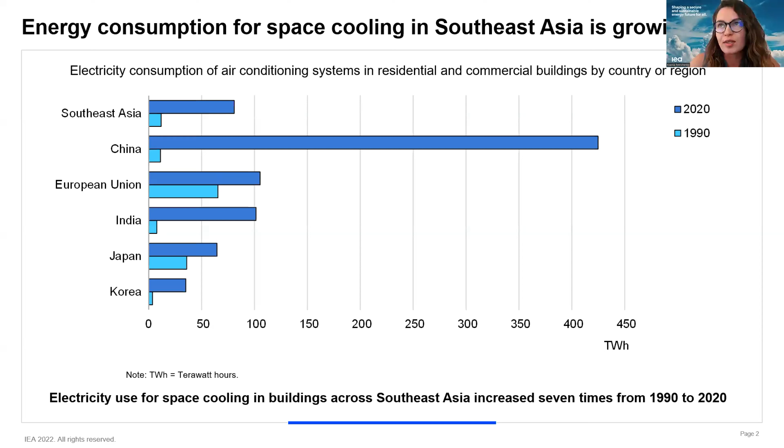From about 12 terawatt hours in 1990 to 80 terawatt hours in 2020, which is almost equivalent to the total annual electricity consumption of the whole country of the Philippines, just to give you a sense of the magnitude.

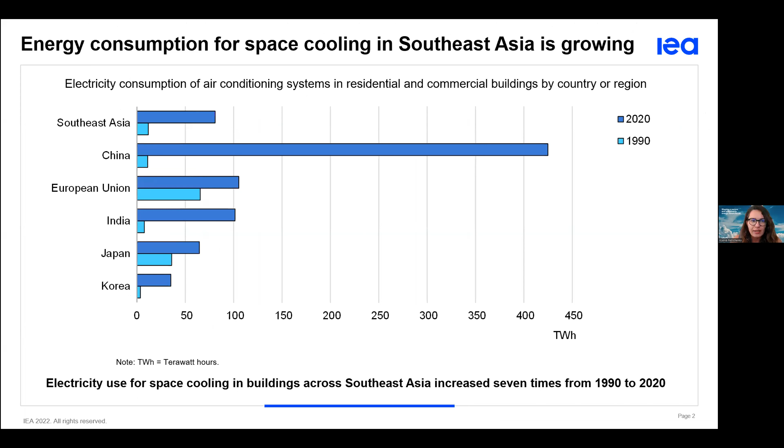In any case, this suggests there is significant potential for growth in the air conditioner market and other space cooling appliances, especially as we see, as Lily mentioned, a significant increase in temperatures and heat waves, with people facing higher heat stress and risk to health, productivity, and the economy.

So IEA estimates that the stock of ACs in ASEAN countries will reach 300 million by 2040, compared to only 50 million today. At the same time, we still estimate that about 40% of the population in this region will not have access to clean and reliable space cooling to satisfy their thermal comfort.

The good news is that the future is not set in stone, and with energy efficiency measures both on the equipment side of cooling, but also in buildings, so more passive measures through improving building envelopes, we can substantially reduce and mitigate the expected growth in electricity demand for cooling and save about 110 terawatt hours of electricity by 2040. This is about the current electricity consumption of Brunei, Cambodia, Lao PDR, and Vietnam combined.

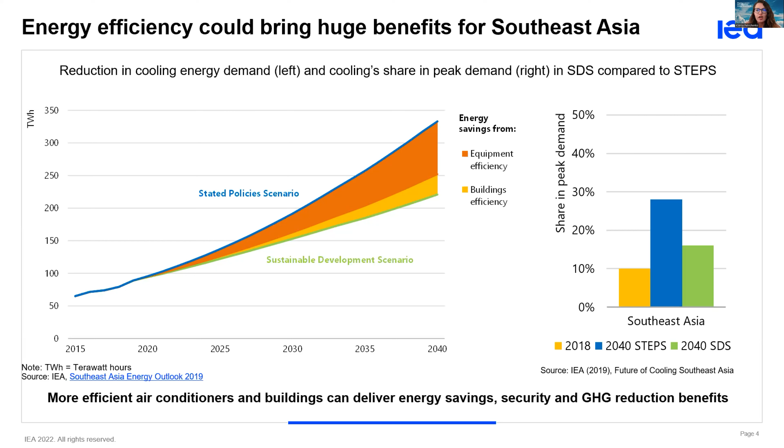On the right-hand side, on the right chart, you can also see that energy efficiency measures can substantially reduce the increase in share of space cooling in peak demand, which is also very important as countries are planning for new power generating infrastructure. With this in mind, IEA developed two roadmaps this year, one on energy efficient space cooling, and the other one on buildings and construction in the ASEAN region.

And these two roadmaps were prepared in collaboration with the ASEAN Centre for Energy and ASEAN Secretariat, and should really be looked at in conjunction, because they are very complementary, and we shouldn't be looking at space cooling in isolation, but really with synergies with the built environment, also with urban planning, as Lily also mentioned.

So we looked at the status of key cooling policies across the region, and as you can see, many ASEAN countries have already implemented mandatory minimum energy performance standards and labeling, or are in the process of developing them for key appliances, air conditioners among them. Fans, which are also one of the key space cooling appliances in the region, are much less prioritized, unfortunately, in terms of policies and regulation. So there is definitely a gap in that regard.

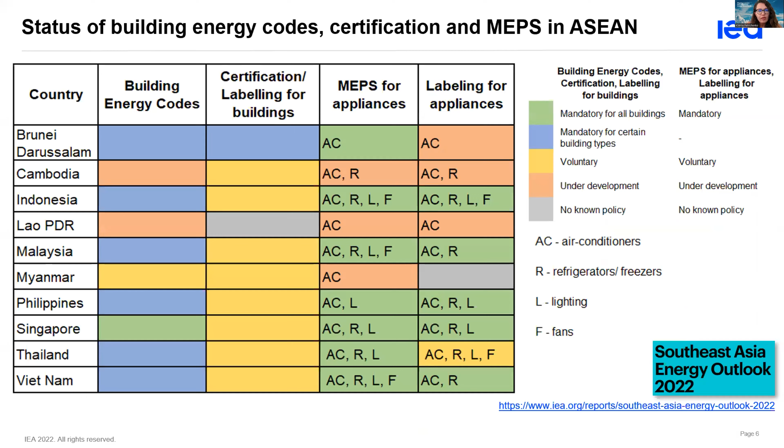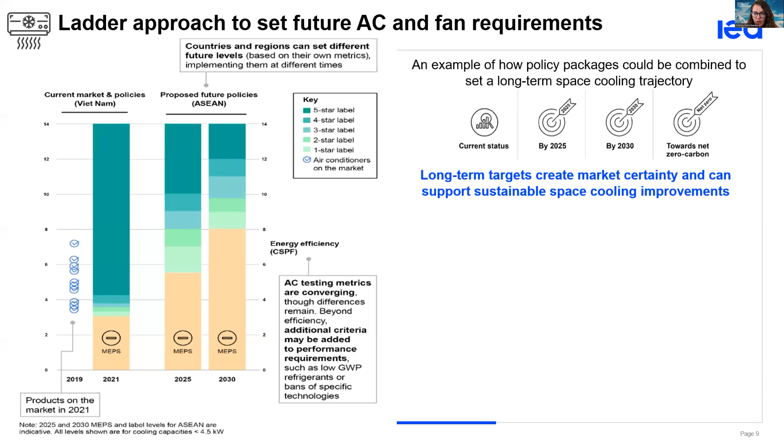And also a lot of appliances are in the 5-star label category, which also limits the incentives to develop much more efficient products. So this kind of ladder approach really helps to set the long-term targets and create market certainty in the long term, also communicate with manufacturers and industry to show what are the updates which are coming up, so the industry has time and can build capacity to adapt to these requirements.

My last chart, just another example from Indonesia on how important this ladder approach is. Indonesia has developed a new label rating last year. And you can see that if you look at the top two bars for 5 and 4 stars labels for air conditioners, the percentage shows how many appliances on the market fall within those two categories. And we can see that about 1/3 of the market is above the new 3-star level already at the moment of

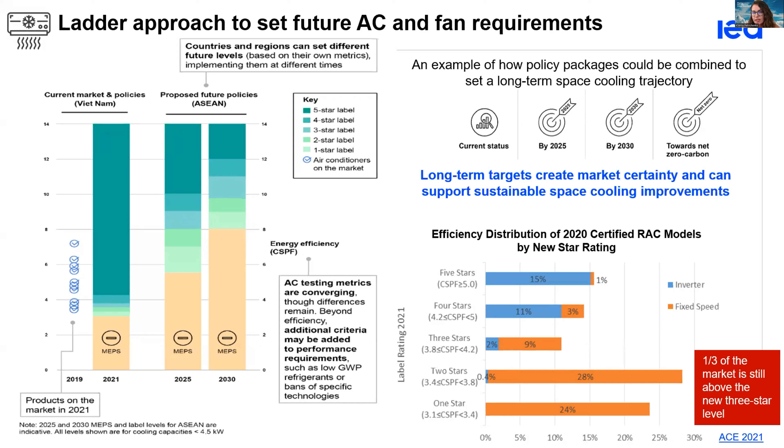enforcing these new standards. So again quite a lot of the market is compliant with a high level efficiency rating, which means that it needs to be further incentivized with the regulation in order to improve the efficiency of the appliances across the market. So with that, I will stop here and happy to answer any questions.

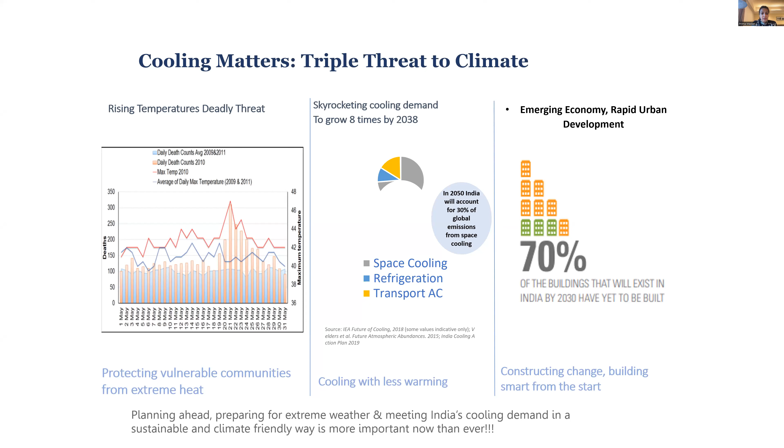Moving a bit towards extreme heat, which further accentuates the need for cooling. Now, we know, and we have experienced it again this year, that climate change is fueling frequent, intense and longer heat waves. Cities and countries which had not really seen rising temperatures earlier on are now really witnessing that globally.

So NRDC, with a broad set of partners, works with government leaders and key experts across India and internationally to develop, launch and implement heat action plans. These plans are comprehensive plans for building resilience to extreme heat events through public awareness and community outreach, early warning systems and interagency coordination mechanisms, capacity building amongst healthcare professionals, and reducing heat exposures and promoting adaptive measures. So public health really is the core of these action plans. Our plans are really focused on protecting health from extreme heat.

Ahmedabad was the first city to develop a heat action plan back in 2013, working with local partners, the Indian Institute of Public Health, Gandhinagar, and the Natural Resources Defense Council. A peer-reviewed study later estimated that nearly 1,200 deaths each year were avoided after implementing the heat action plan in Ahmedabad.

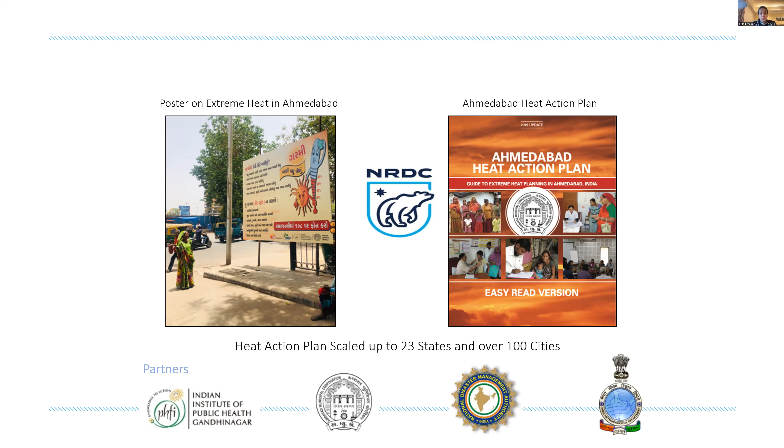Since then, the heat action plan has expanded to over 23 states and 100 cities and districts in India through the leadership of the national agency, the National Disaster Management Authority. So the heat action plan is really an example of how action at a city or state level can be scaled up at a national level. An important component of the heat action plan now is cool roofs as a resilience strategy to extreme heat, and I will turn to that topic now. Next slide, please.

So with a particular focus on vulnerable communities, we have been engaging with cities and states for wide-scale implementation of cool roofs. Cool roof programs implemented at scale can potentially reduce cooling demand through energy savings in air-conditioned buildings, and in unconditioned buildings by providing better comfort and therefore reducing the need for cooling. The India Cooling Action Plan, ICAP, has also identified cool roofs and localized heat action plans as a key strategy to enable cooling and thermal comfort, especially for the economically weaker sections.

Just to talk a bit about cool roofs now. Cool roofs offer a simple and very cost-effective solution to urbanization challenges. An important component of a building which has direct impact on its energy consumption and thermal comfort is the roof. Cool roofs function primarily by reflecting more of the sunlight incident on the roof back to the atmosphere than a regular roof. With lesser heat absorption, the room beneath that roof becomes more comfortable in terms of temperature.

In 2017 and 2018, the cities of Ahmedabad and Hyderabad initiated pilot cool roof programs focused on vulnerable communities. The picture on the right shows one of the household owners in a low-income community in Ahmedabad, Meena Ben. Here we implemented cool roofs with our local partners, Mahila Housing Trust, using a solar reflective white paint. She discussed with us her experience of how it felt after the roof was painted with solar reflective paint.

These three boxes mention the benefits of cool roofs for an air-conditioned building, for an unconditioned building, and even at a city level. These range from potential energy savings and thermal comfort to enhanced productivity, and at a large scale, a reduction in the urban heat island effect on a long-term basis. Now, can we move to the next slide?

Yes, please. Yeah. These slides are all over. My apologies for that. They are not depicting the earlier, the formatting is all over.

But just to talk about the materials, there are a range of cool roof materials that are available in the market, differing in cost and durability. The typical cool roofs include coated cool roofs, which involve a coating of a material or a paint with high reflectivity, and a membrane roof, which consists of prefabricated materials, tiles and China mosaic, and also green roof.

Now, the choice of an appropriate material really depends on the specific context for some of the factors, such as the existing roof material, the life and maintenance, availability, the cost, the time needed for installation, and availability of skilled labor to install that roof. So these are some of the factors that are involved.

The cost of these roofs typically varies from, say, 20 rupees for a cool paint to about 100 rupees per square feet for a tile or a membrane. And the manufacturers claim to have payback of 2 to 2.5 years. The coating, which is a solar reflective paint, is typically required to be reapplied every 4 to 5 years. But over the long run, combining energy savings with reduced roof maintenance, it offers a very good bargain.

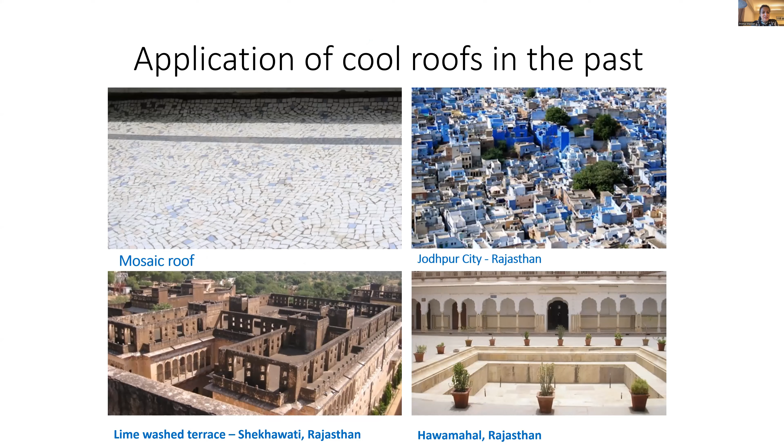If you go to the next slide. Yeah, these are just examples of some of the roofs that have been implemented traditionally in India. So it's not a new concept that has now come to surface, but it has been applied in traditional architecture. Next slide, please. Again, these are just examples of current applications. I'm going to skip and move to the next slide. Next slide, please.

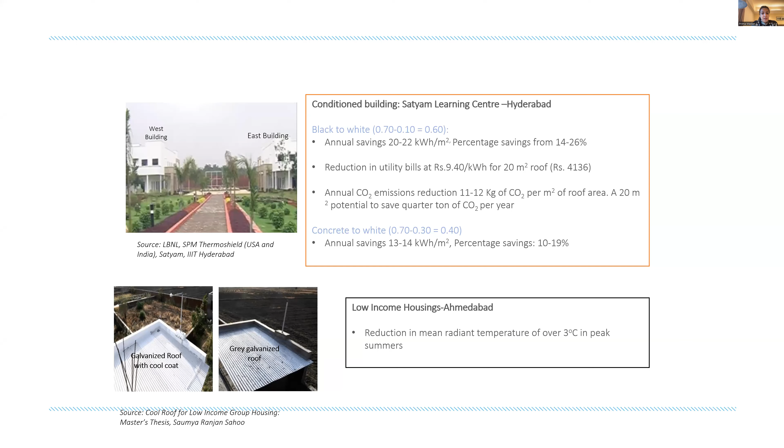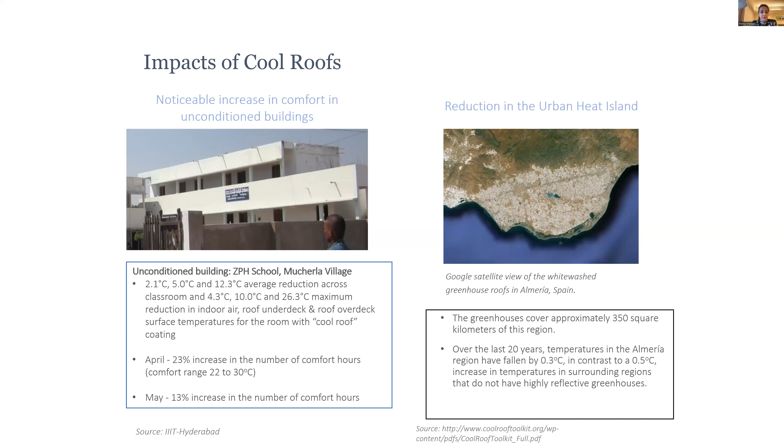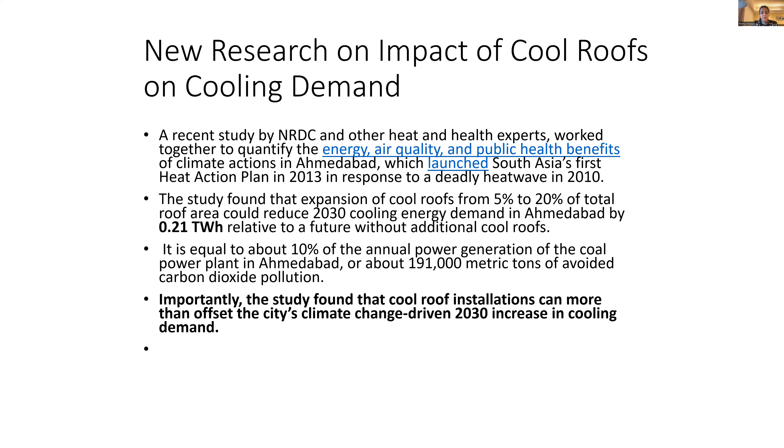Now, this number by itself seems to be small, but the study examines the additional need for cooling because of a rising cooling demand as a result of higher temperature. So in that sense, only by achieving 20%, you're able to offset that additional cooling demand because of an increase in temperature by 2030. This will be released in a couple of weeks. Next slide.

Building on these pilots and the robust evidence base created at a local level, we worked with these cities to draw up a scale-up plan for Telangana. We call it making Telangana a cool state. This was largely designed to scale up cool roofs across all buildings and devise financial, regulatory, and awareness and outreach mechanisms required by each building type, and also to design an institutional structure for this program.

Here I wanted to mention the process we follow. To develop a Telangana Cool Roof program based on the local evidence base, we worked with partners to develop this program. It had several steps: first, understanding the local evidence base, then working with stakeholders to seek feedback on potential barriers to cool roofs at scale.

We also surveyed the availability of cool roof material in the state where the city is. To implement at scale, we thought it important to have a robust interagency coordination mechanism defining who will do what, which agency would be primary, and how to show accountability within the state. This program was out for public commenting a year and a half back, meant to be released last year, but COVID set things off track.

We're hoping to have this released by the end of this year. Making Telangana a cool state was designed with the objective of driving rapid statewide adoption of cool roofs, designing an interagency coordination mechanism, identifying financing and outreach and awareness generation tools for each building type, and workforce development, training and capacity building.

We designed this program based on three building types: government and commercial, where the driver is energy savings and thermal comfort, mandating it for these building segments; and the residential program, more voluntary in nature, where the biggest driver is thermal comfort, which we thought would come along once evidence is created at the government and commercial building level.

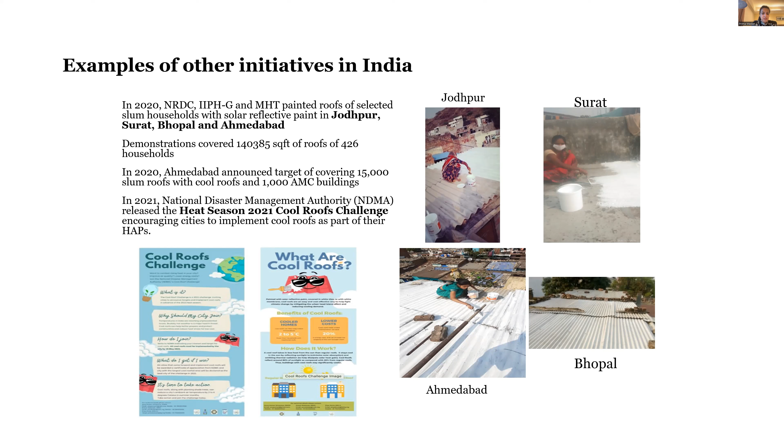Thank you, Prima, I appreciate your presentation. I'm sorry about the formatting as well, I think something happened there. That was a really insightful and exciting project.

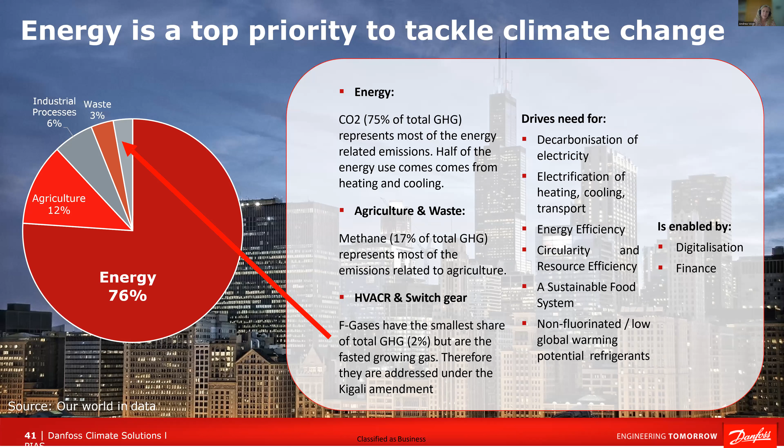What I also wanted to point out is that when people think about cooling and air conditioning, they tend to think immediately about small residential air conditioners, and about developing countries and how important it is in very hot climate zones. But actually this is really changing. It's not only important for very hot climate zones, it's also increasingly important for climate zones that need both heating and cooling. We see that the number of cooling days, in inverted commas, is increasing also in those climate zones, which drives the need to move from only looking at the efficiency of a small residential air conditioner, for example, towards a more system-based approach, which is what I would like to talk about today in this presentation. Next slide, please.

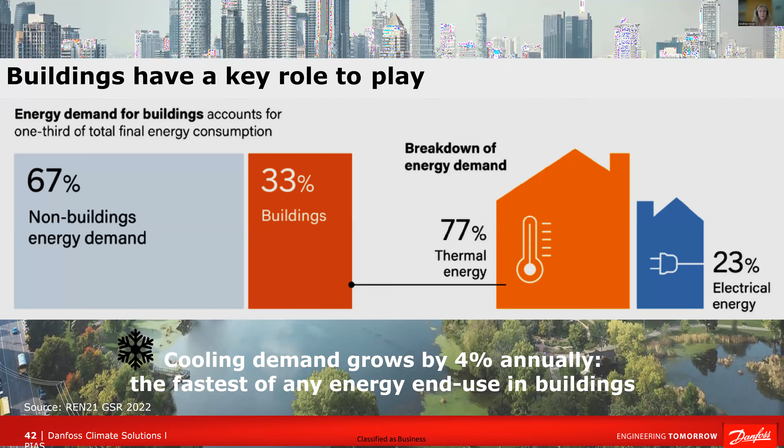So what we really do need—this also screwed up the presentation mode, so the formatting looked actually quite nice on the original one. This is really to point out the need for an integrated approach, and not only look at the appliance in itself or the air conditioner in itself, but also see this in a bigger system.

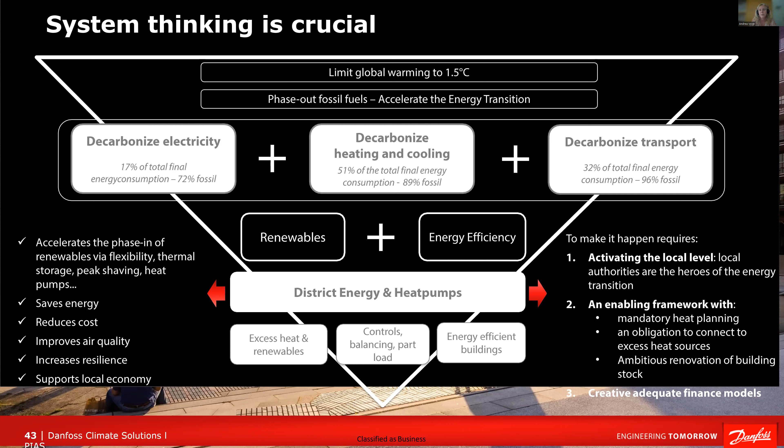This can accelerate the phase-in of renewables in terms of providing flexibility. If you have a system, you have much more possibility to play with storage and flexibility to mitigate peak loads, and also combine this with heat pumps. That saves energy, reduces cost, and also improves air quality. If you're in a city with many small air conditioners running at full speed everywhere, that creates a lot of heat, which increases the temperature in the city, and then we enter a vicious circle. So that's a strong case for a system-based approach, and in that case for district cooling, plus a number of other advantages which I'll explain in more detail.

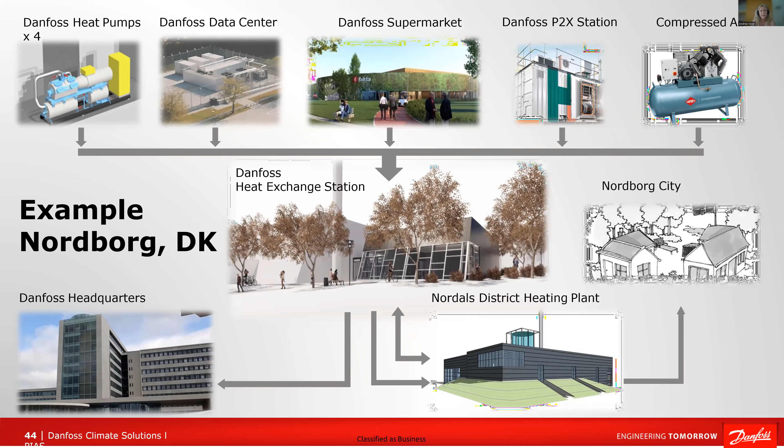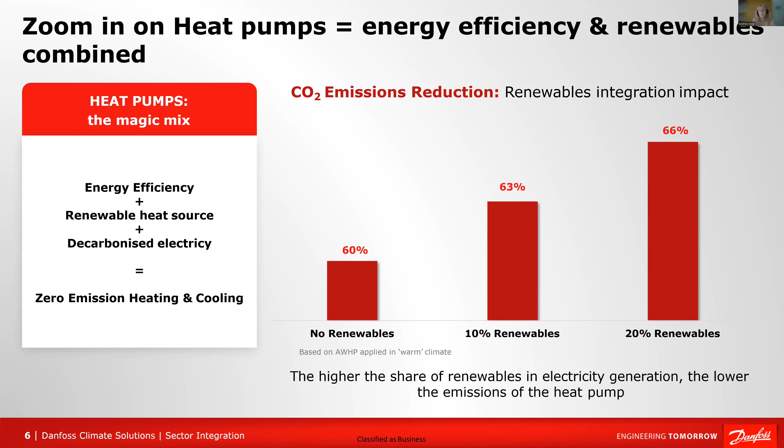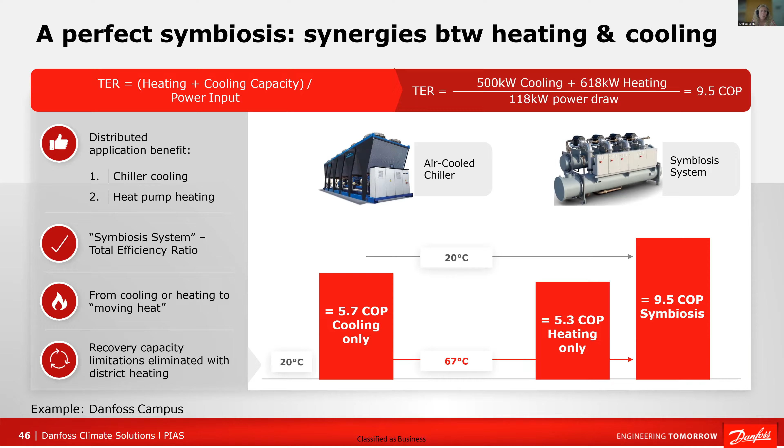And next slide, please. Excuse me, would you mind wrapping up your presentation a little earlier? Thank you. Yes, I do.

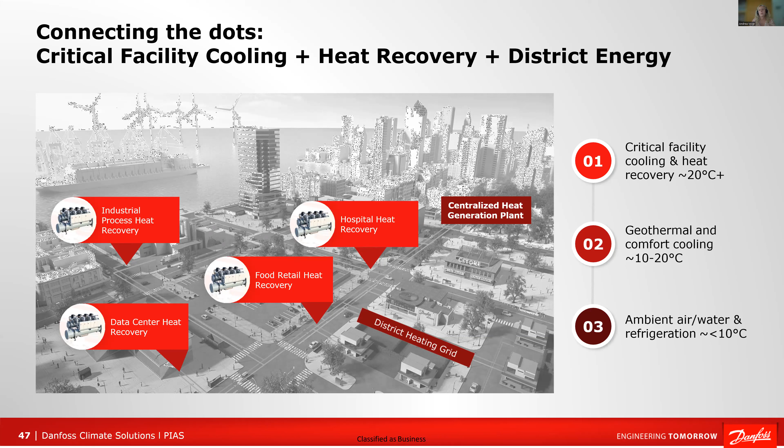I'm nearly there, actually. So this is just a summary showing how this can be used. If we look really at critical facility cooling, and that can be hospitals or food retail or data centers, etc., and how those symbiosis advantages can be used across the board and increase the efficiency. Next slide.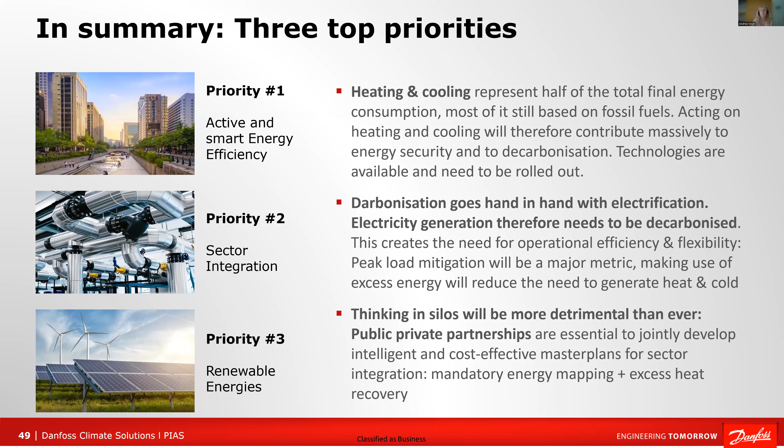And we have to move to renewable energies. And for that, we should not think in silos, but bring it all together, work together between governments and also industry, develop master plans and have a mandatory energy mapping and excess heat recovery to make this happen on the ground. And you can skip the last one. That's just an overview of Danfoss. Thank you.

Thank you, Andrea. That was an excellent presentation about systems thinking. And next, I know we're running a little over time here, but we do have Demetrios Karamitos here, who's joining us from the Basel Agency for Sustainable Energy and is going to be speaking on cooling as a service. So thinking about those financing mechanisms for how we can integrate cooling.

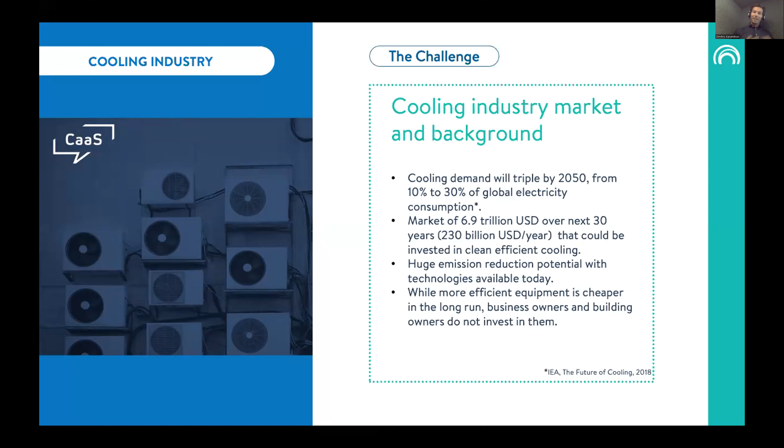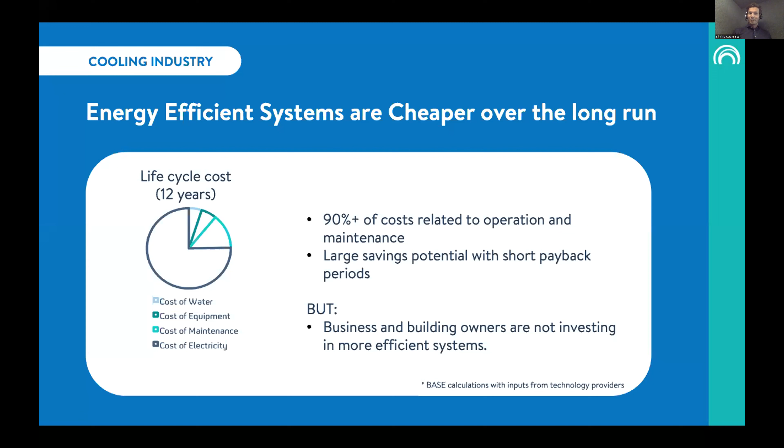So typically, if you look at cooling, 90% of the costs of a system, when you look at the life cycle of this system, is related to the operation of that system. So energy usage, water, maintenance, and so on. But even though the selling cost represents a fraction of this overall cost, users and businesses engage with systems that are cheaper to buy upfront.

And the main market barriers that we see of why this is happening can really be summarized in 4 barriers. First, the upfront investment cost. Systems which are more innovative, using, for instance, clean refrigerants, and that are more energy efficient, are more expensive to buy upfront. There is also, and this is very understandable, a lack of trust in performance. When you're a buyer, you're not an expert in those technologies, so you rely on other experts, and on the trust in the entity selling you those solutions.

And then typically, if you're a business, let's say a supermarket, a hotel, offices, or an industrial facility, you have priorities in investing. So for instance, if it's a hotel, you're going to make the hotel more pretty, more appealing for your customers, instead of investing into a more energy efficient cooling system. And then typically there is also a lack of trust in maintenance and spare parts.

To give you an example briefly, there was a customer in the airport industry that had engaged with an innovative system. It was not in this example a cooling solution, it was rather a system core to their operations, and the system had an operation issue, and it took more than 2 months to repair that system. So as a result, for new purchases, the customer is really having this trust issue.

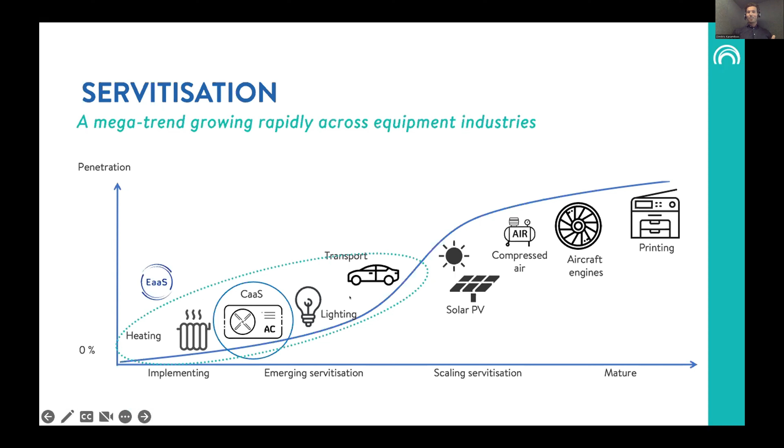And actually, this graph is from more than 2 years ago, and I'm very happy to say that heating and cooling is already further up the curve of maturity in this industry. So what is the model? Really, it's a shift from customers buying assets to paying per use of cooling. So it's a shift from a CapEx to an OpEx model. And it aligns the incentives for efficient production and efficient consumption between the user and the solution provider.

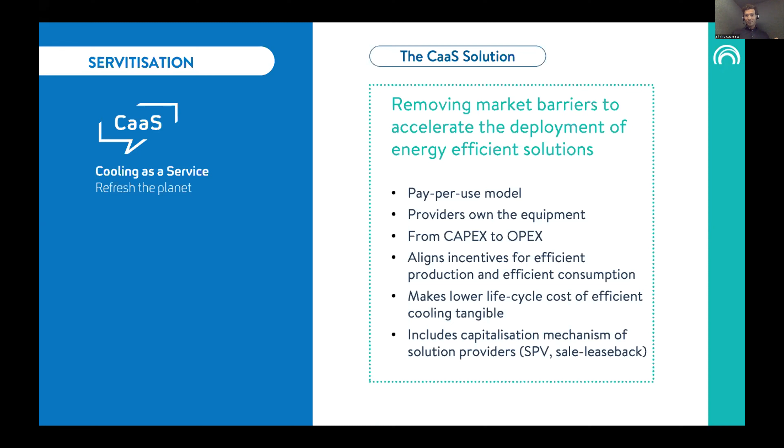On one side, the solution provider has the incentive to implement a solution that is reliable and energy efficient, because they're selling an output to the end customer, who also has the incentive to implement the more energy efficient system, because it ends up being cheaper to pay for. If you compare apples to apples, a system that is not energy efficient is going to be much more expensive on a monthly basis, because the cost incorporates maintenance, implementation, energy and water consumption costs. So as a result, the more energy efficient system is going to be much more price competitive.

Just to compare a little bit with different models on the market, and there I'd like to echo what Andrea mentioned. For instance, district heating and cooling is really a strong solution to go for cities that have the opportunity to implement such infrastructures. But of course, in some areas, you don't have the ability from a land perspective to implement district heating. So there, the difference is that cooling as a service is more decentralized district heating or cooling, whereby one system can provide heating or cooling to several buildings or one building per se, but not an entire city. So also from an investment perspective, it's smaller investments.

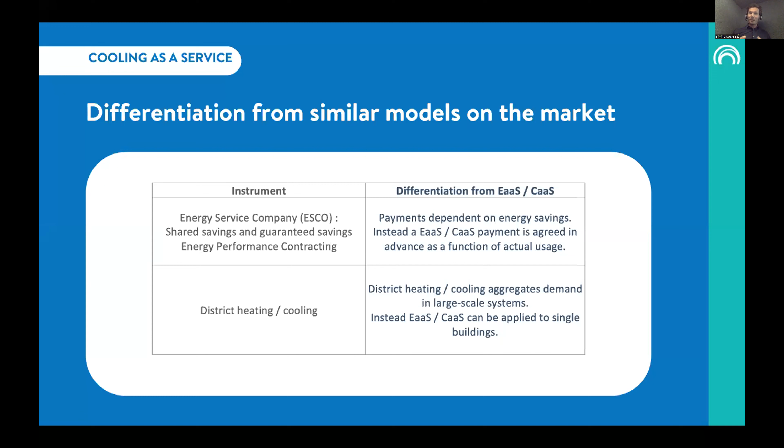The difference with an ESCO model is that it's not guaranteed on savings. So the customer really pays per consumption. And very briefly, it's not mentioned on this slide, but the difference with a leasing model is that when a customer engages on a leasing contract for a system, that customer still bears the risks of that system because they end up owning the technology. Whereas on cooling as a service, the risk is really with the solution provider, meaning that if the system is not working, the customer is not paying for the service they're signing up for.

So just very high level, who are the actors involved? Of course, you have the users who benefit from direct access to high technology. They have no performance risks. They have no capital expenditure upfront. And I'll run through this very briefly. The solution providers really have the incentive to deploy the most innovative solutions they have in their portfolio. And also within an existing contract with the customer, they have the incentive to keep innovating, because the more efficient they are, the more their profit margin will be for the solution they provide.

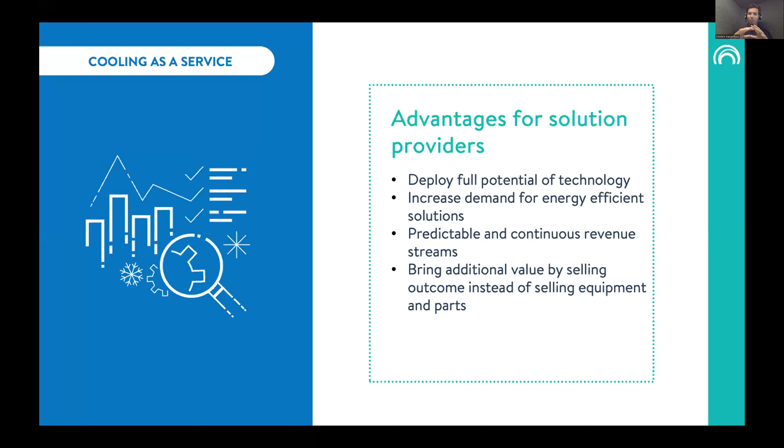And it's not mentioned here in the slide, but it's engaging the solution providers to think long-term, and therefore, for instance, implement clean refrigerants that will be aligned with the regulations 2 years down the road, 5 years down the road, or even 10 years down the road. And it's also enforcing them to think in a circular economy perspective, so that each part can be substituted within a subsystem more quickly and effectively.

And for the financiers, of course, it's an opportunity to invest into green projects and projects which are also low risk, because these technologies are very mature on the market and they're very long-term operational. So for financiers that look to, for instance, decarbonize their scope 3, it's a very interesting market to tackle. I'll skip through this rather quickly, and I'll show the crowd some examples.

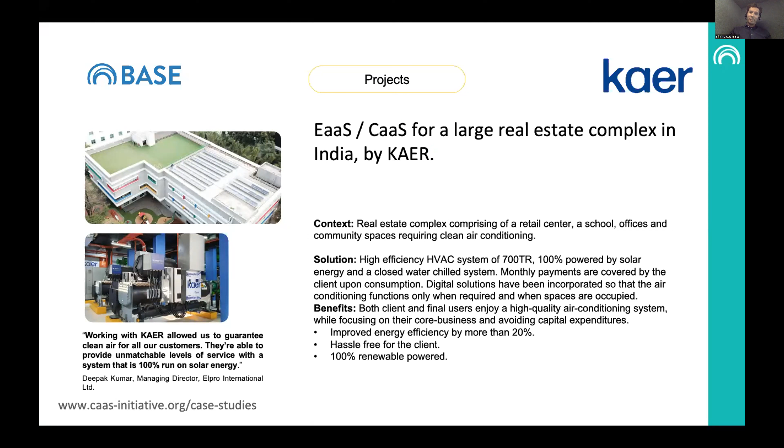So here, for instance, you have one of our partners based in Singapore that implemented a project in India, several of them, but this is an example. Their name is KAER, and they enabled a real estate complex to shift from day one to an energy efficient cooling device, which was, I think, more than 20% increase in efficiency. And today I can confirm that that system runs with an improvement of 30%, and it's fully solar powered. So especially in a country that is dependent on a grid which is coal powered, this is really a strong solution to decarbonize the market quickly.

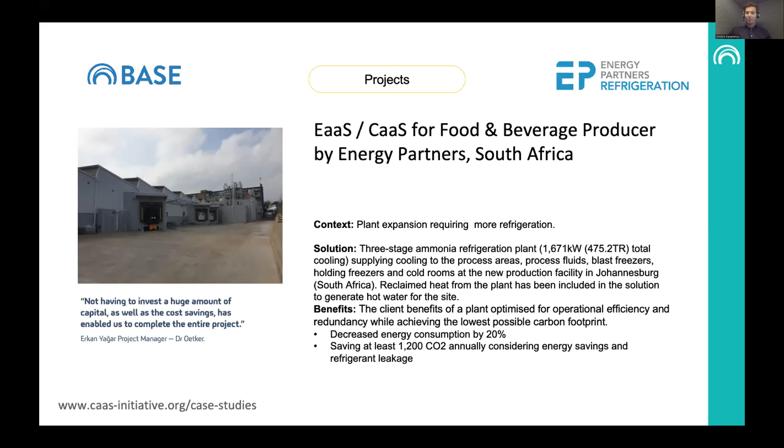It's a partner in South Africa called Energy Partners Refrigeration that has been really scaling up applications of cooling as a service, and again, powered by solar energy, which, for a grid which is typically powered by coal and that is unreliable because they often have blackouts, is super appealing, of course, for customers because it lowers their risks of operation.

How did we support the market? As the Basel Agency for Sustainable Energy, we really acted on 4 pillars. The first one is the development of tools. So tools are, for instance, standardized contracts, pricing models, financial structures for those entities to engage with cooling as a service. So how do you supply cooling as a service? How do you shift from selling assets to selling services? The second pillar is a lot of capacity building. So we built an alliance of, today, more than 75 or 78 members on board that really support that model.

And I'm very happy to actually mention that Danfoss is part of this alliance. We supported projects around the world with really expert advice on how to deploy servitization. And we raised a lot of awareness doing webinars, case studies, videos, and all of this is actually available online for free.

And we launched recently what we call the SET Alliance, which is the Global Servitization for Energy Transition Alliance. And if you're interested to know more about this alliance, on how to apply cooling as a service and also this model in other activities like heating, lighting, energy storage, I invite you to check the website and reach out. And this is, of course, one solution among others on the market. But indeed, time is of essence, and we really have to go fast. So there we go. I'll stop here, and I'll give you back the screen, Kayla.